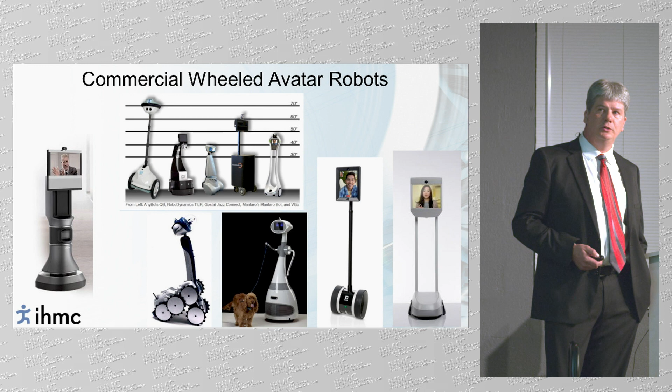There are actually some commercial versions of these. There's probably over a dozen companies that have tried to make money on these. You don't see them very often, so I don't know how well they're doing. We have bought this Double bot here we use occasionally, but hopefully there'll be markets for these sort of things. But as you see, they have no arms. They're pretty much like a teleconference device on wheels. They do have some advantages over just having a teleconference, but you can't do much with them.

And then, of course, we're always competing with sci-fi. I actually started using the word avatar for these robotic systems well before this movie came out, so not copying it. But in the movie Avatar, you have kind of an MRI-like device you sit in, and it can read your brain waves, and therefore you can somehow, through the magic of movies, teleoperate a biological robot and do things like fly around on these lizards.

Another amazing movie that I like is Surrogates, with Bruce Willis. Here, he lays on his couch all day wearing some sort of brain interface so that he can get his hair back and look a lot younger. Everybody in the world in this movie is a humanoid robot, and everyone's just sleeping on their couch, and of course, things go bad from that. So we don't have those technologies yet.

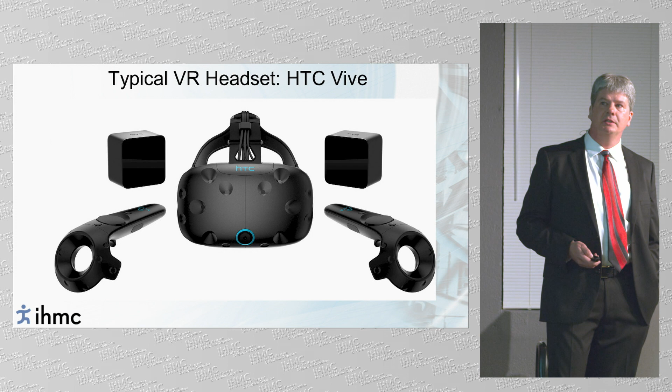The interface devices we have, some of the virtual reality goggles, are coming along really nicely. This is a Vive from HTC that I'll show operating a robot with. And as far as the sensors go, we've got good cameras. LiDAR is a spinning laser that shoots out into the world and measures the reflection time, and from that knows where points in the world are. I'll show what the data from that looks like, right here. So as it's picking up points, this is real time.

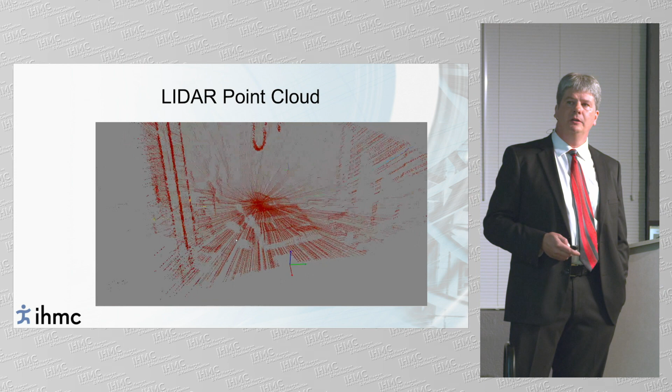It starts building a representation of the world. It's just a bunch of points, so it has to determine what that means. So what we typically do is look for flat surfaces that are good to walk on, and then combining that with your cameras, you can get color information, and it's really good for an operator, and people are coming up with really good algorithms for using that data.

So here's one of the humanoid avatar pioneers. Senator Rubio came and we gave him a tour, and in the background you can see Atlas there. He was able to, with just a couple minutes of training, walk over a pile of cinder blocks using the system.

Here's our professional operator, John Carff, who was our operator in the DARPA Robotics Challenge, using the headset to control Valkyrie here to pick up some water bottles and recycle them. So you might notice he'll move his arm before the robot does because he's not directly one-to-one controlling it.

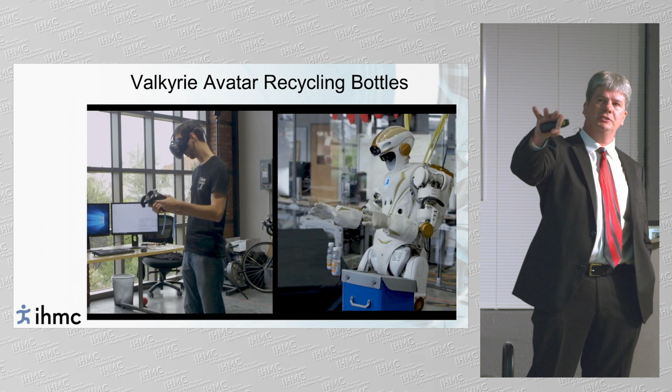In this one, he's kind of saying, okay, I want the arm to go there, looks good, go. And then the robot will change its body configuration to be able to get to that reach. So it's doing a lot of computation behind the scenes. The only thing that's being tracked on John is where his hands are and where his head's looking.

This is Atlas walking over a pile of cinder blocks, and so we gave John the challenge of: go over a pile of cinder blocks, grab a ball, move the trash can out of the way, and put the ball in the garbage can as quickly as you can. So this also is real time. I say that because a lot of our videos are really slow, so we speed them up, but not this one.

You can see in the bottom right, here John's kind of directly operating it where he's saying where each footstep should be. We also have algorithms for saying, okay, I want to walk over there, which he'll be doing after he picks up the ball, and he'll plan a path and some footsteps. There you saw him just kind of swipe in on the bottom right, the camera view.

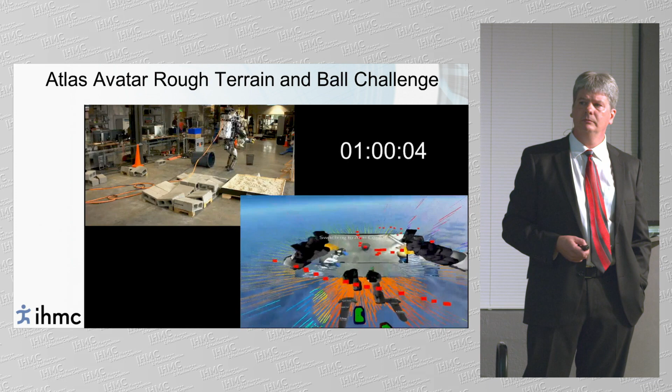So everything you're seeing back here is just the LiDAR points. So you get a pretty good representation as a human of what you're seeing, but then add on top of that the camera, and it's pretty good. And we're working on better algorithms for better operator interfaces, but I think there's quite a bit we can do with just these $500 virtual reality systems. So he was able to complete the challenge in about 1:10.

Okay, so that's Avatar robots. So why humanoid? I get this question a lot, and it's a good question. And so first, what do I mean by humanoid? So in my mind, we pretty much try to copy humans, but a lot of people are against that. Like, oh, maybe you can do better than nature, or why copy when the goal is just to get somewhere?

But humans have lots of advantages, and so by humanoid, I mean you pretty much have 2 legs, 2 arms. You use the arms mostly for manipulation, the legs mostly for mobility. You've got some sort of head with vision, maybe speech and hearing. You need a good sense of gravity because you're going to have to actively balance, because you're going to have a bipedal mode where sometimes you're on one foot, so you have to balance.

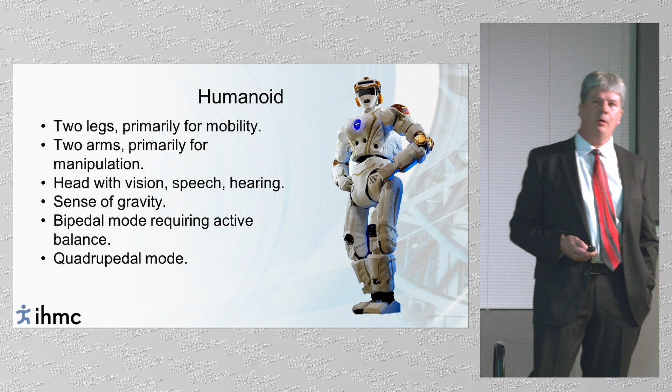But you might also have a quadrupedal mode. Humans don't use a quadrupedal mode much, but indeed we are quadrupeds. It isn't a question of making a quadruped versus a biped. It's more, in my mind, a question of how often are you quadrupedal versus how often you are bipedal.

So why humanoid? Well, the short answer is go where people go and do what people do. And if you think about where people can go and the things people can do when they get there, it's just incredible. I mean, this is just a small sampling of some of the mobility challenges that we face. And think of the different types of platforms, and here I just have 4 samples, and think about what it's like for each of them.

So you got the humanoid, quadruped, wheeled, and tracked. Think about what it's like for them and what the major limiting factor is for getting over some of these obstacles. It becomes readily apparent why humanoid has its advantages. So if you have a large gap, you're limited by your leg length. Well, human leg length is about 1 meter, so you can get over approximately a 1 meter gap without having to jump.

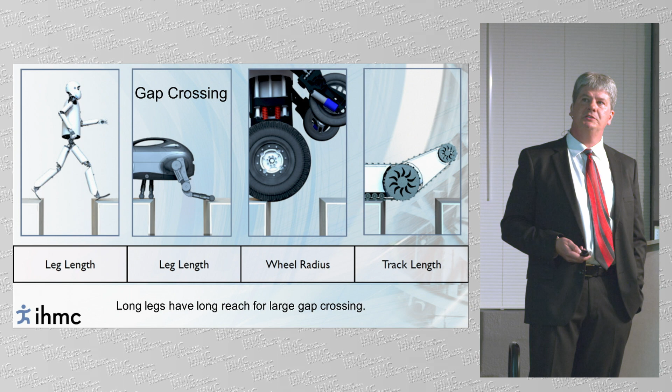A quadruped could do that if its leg was 1 meter long, so you're talking horse size. Of course, a dog could jump, but if you're not jumping, then you're going to be very large to get over a 1 meter gap. Something with a wheel to get over a 1 meter gap is going to have a meter radius wheel, so it's going to be enormous. And same with something with a track. And if you go through these one at a time, you keep seeing that you got great advantages.

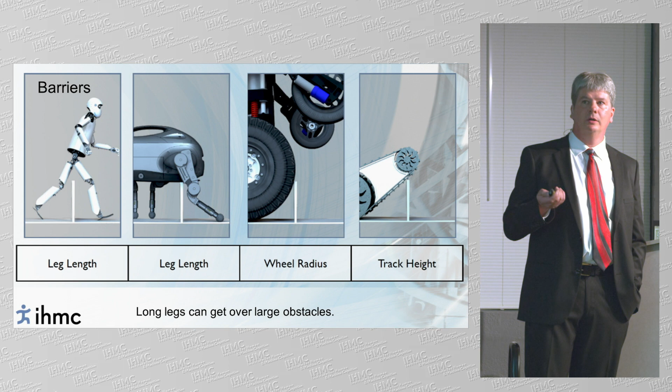If you're trying to get over something like a Jersey barrier, well, you need to be a tank if you've got wheels or tracks, or a horse. But a human can get over no problem. A human can get over a half-meter step, no problem. All of them do well on slopes.

Humans can climb ladders really well in the quadrupedal mode, whereas these other guys, you really couldn't do a ladder at all. And yes, dogs can climb ladders. If you have any question about can animal X do Y, the answer is going to be yes. Just YouTube for it, and you'll find it.

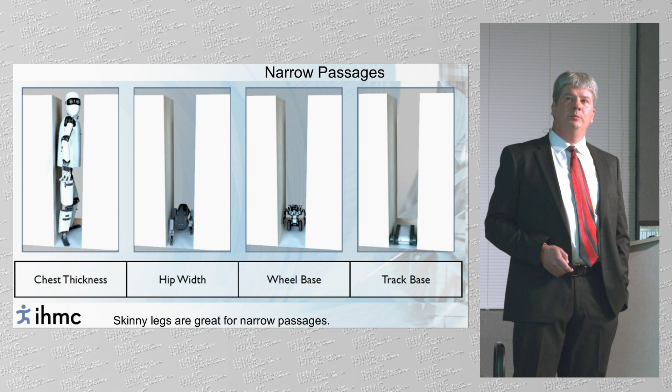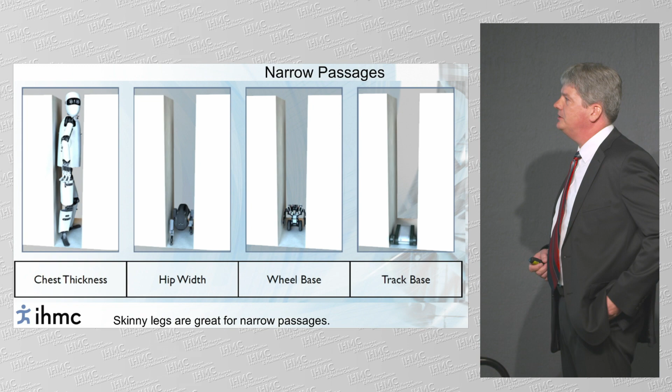Here's where humans really shine: narrow passages. So if you take a somewhat overweight 47-year-old male, the distance from chest to back is around 12 to 15 inches, maybe a little bit more if you're carrying a backpack. So you can have two sheer walls about that far away and you can get through it.

Whereas if you want to get through that with these other types of platforms, they have to be really small. So in some situations, these robots would have to be huge to get to the same place a human can. Sometimes they'd have to be really small, therefore they can't get to all the same places. And then if the gaps are only waist height, they only need to be about 8 inches apart. Your foot itself is only about 4 inches wide. And when you're standing on your toes, they're only about 3.5 inches deep.

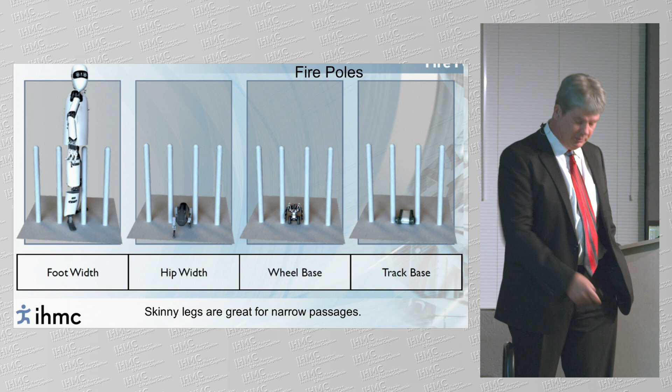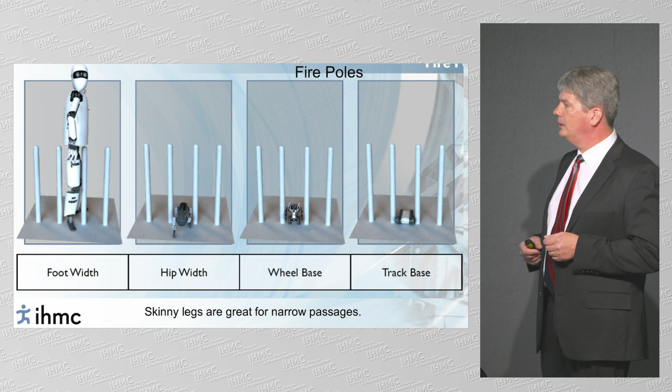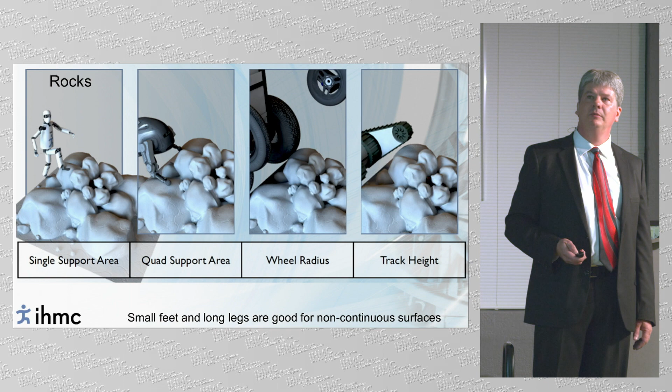So all you need is little pads throughout the environment about 1 meter apart, and you can get from point A to point B as long as you can set down on those. And those little pads that you're walking on can even be pointy rocks, as I'll show later. Balance beam: you'd have to be tiny with these wheeled robots to get over the same balance beam. And yes, dogs walk on balance beams. And rocks, of course, are pretty hard to get over if there's large gaps between them, stepping stones. I mean, the list goes on.

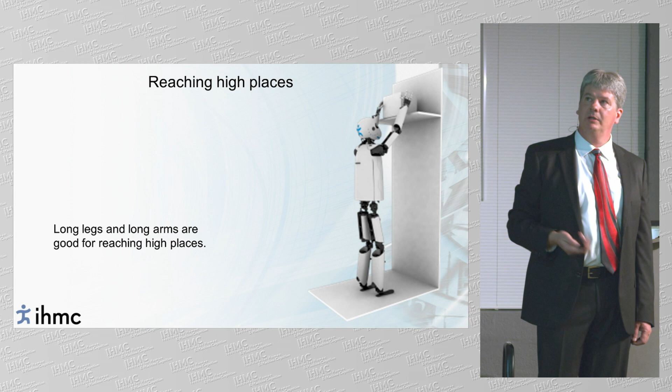Taking corners, you're very narrow, so you can squeeze around corners nicely. And then when you go in your quadrupedal mode, you can get under things nicely. And then you can reach some high places. I can easily reach something 7 feet up on a shelf and grab a book or whatever I'm looking for. So if you put it all together, humans are pretty good at each one of these things. And if you look at all the different things humans can do, they're pretty good.

They might not be the optimal solution for any one of them, but we're not trying to optimize for one thing. We're trying to find general purpose things that can get everywhere a human can get to, whereas the other things have trouble in a lot of them. And you think about where humans can get, it's really incredible the things they can do. I would argue that humans and humanoids, including monkeys and apes, are probably the most mobile land-based animals just by the shape of our body.

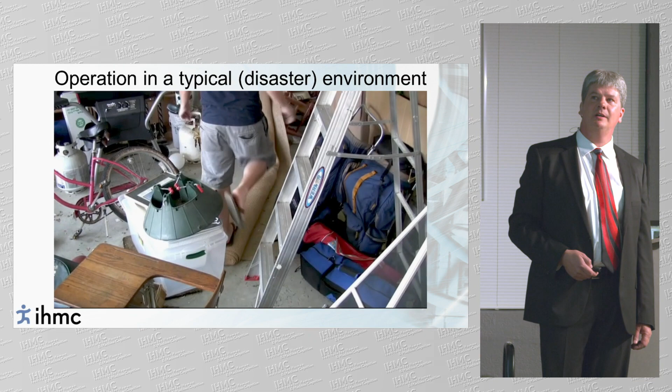And we're interested in disaster environments. So here's a typical disaster environment. And Jason here is showing how mobile he is. Try to imagine a wheeled or tracked robot getting through this typical disaster environment. And then we like to do various manipulation tasks, so he needed his tennis racket.

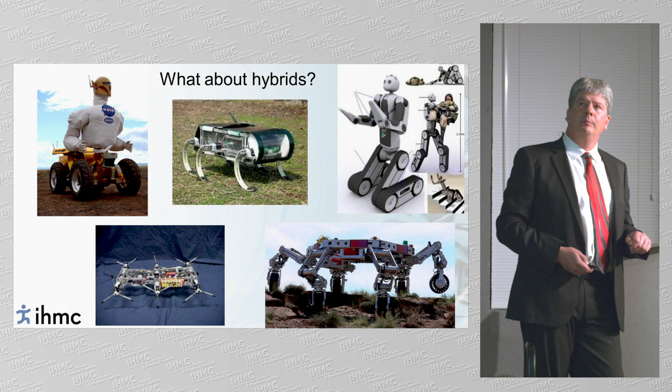Okay, so another question a lot of people ask me is, okay, great, what about hybrids? Why not get the advantages of both wheels and legs? And that's great, and there have been a lot of example robots out there that are hybrid. Some of these are pretty amazing. And humans are indeed hybrid. We can fly through the air; if we're crazy enough, we can jump out of a perfectly good airplane and coast with nothing but a suit. We can go hundreds of miles an hour, we can go on water, frozen water, everything.

And there have been some humanoid robots. This is just kind of a toy. I don't think it walks, but it's a good concept. During the DARPA Robotics Challenge, we actually had to ride a vehicle. And I think a Segway is a great platform for a humanoid robot to wheel around on. But whenever we use our hybrid appendages, we take them off before we go through our doors.

And it's really doors that are the bane of robots and the bane of our existence. There are lots of robots out in the world, but very few of them are good at going through doors, and none of them as good as a human, especially if there's stuff behind the door or a small door, getting up the steps before a door. And so if you want to thwart a robot, you just go behind a door.

And if you can chain it so that it only opens 8 inches, then humans can pass through it freely, but no robot I know of that's any bigger than my fist can get through it. So humanoid form could.

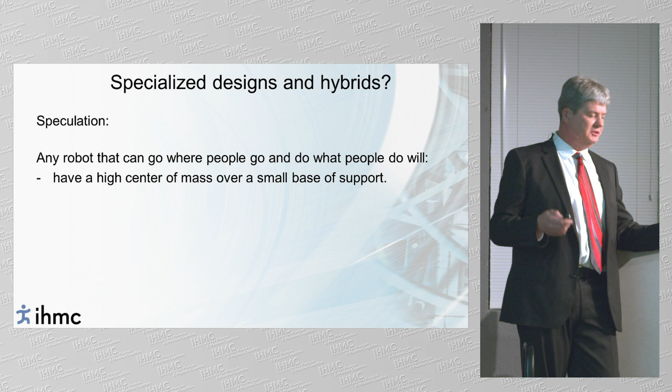So as far as specialized designs, I speculate that any robot that's as mobile as a human is going to have, just by necessity, some high center of mass like humans do over some small base of support. Because if you want to walk through these narrow gaps, you have to have a tall and skinny body. It's just plain and simple.

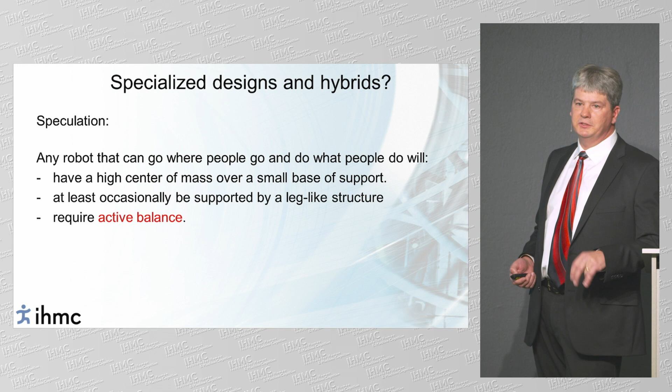And because of that, you're going to have some time when you're supported by some leg-like structure. It might not be something you'd call a leg, but it's going to be leg-like, and that's going to require active balance. And that's really what makes humanoids difficult from a control point of view, is this active balance.

So if you think about the ways we can balance, I'll talk about just standing first, is you can move your center of pressure on your foot. So as I'm standing here, I'm kind of wiggling my center of pressure where the force is on my foot in order to balance. If I start falling, I can take a step. And if I'm about to fall off the edge here, I can lunge a little bit because I can't take a step.

So that's another strategy. These are the three major strategies people use, and robots fall under the same physics as people, so these are the three strategies you have to use in robots. There's a couple others that have more minor effects that I won't get into. These are kind of the three big ones.

I'll go through a little bit of why these strategies work, okay? And really thinking about a tightrope analogy and balancing a broomstick analogy kind of explains 90% of why these strategies work. And using these real simple models of walking, you can come up with control algorithms for balance. So if you think about balancing a broomstick,

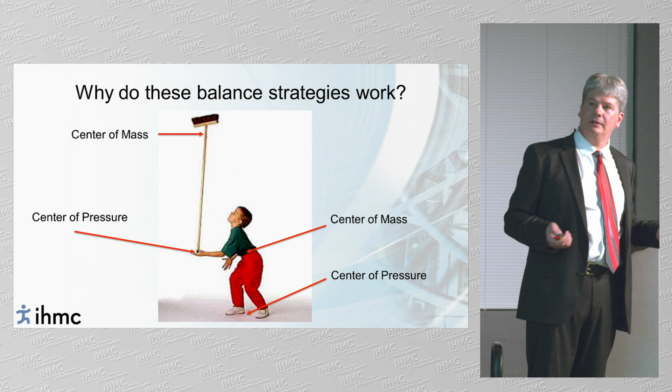Here, center of mass of the broomstick is about there, and the center of pressure is right about there. And what's really impressive is that he's also balancing himself at the same time, and there's center of mass there and center of pressure there. So what's the analogy? So as you're balancing a pendulum, the question is, where do you move your hand to keep it balanced?

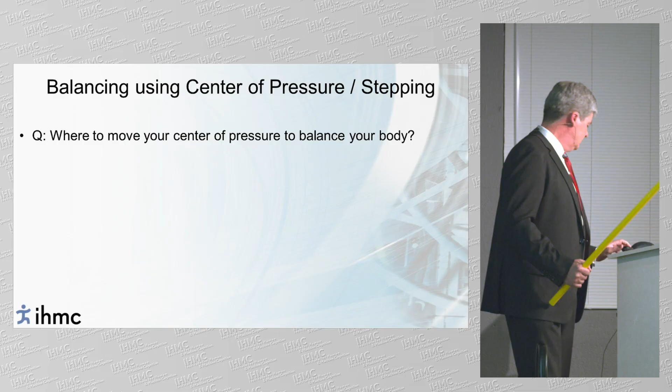And the answer, well, I guess the equivalent question of where do you move your center of pressure on your foot in order to balance is equivalent to where would you move your hand on your broomstick to balance. Okay? And so the answer is pretty much underneath your center of mass.

So if the stick moves, I need to get back under it, right? But the velocity is important too. If the stick's straight up and down, but it's moving that way, and I want to catch it, I'm going to have to get over here to anticipate where it's going to be. So it's some combination of the center of mass position and the velocity that's important for where you should

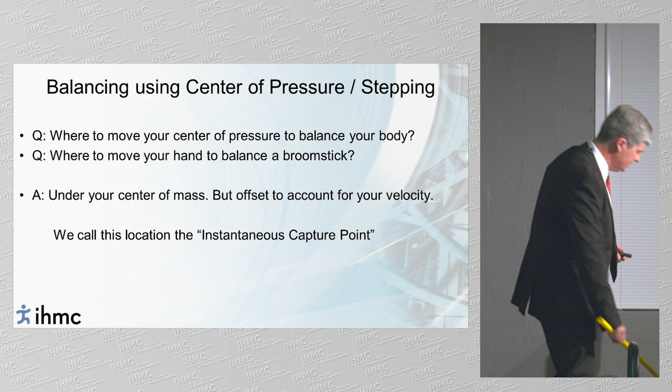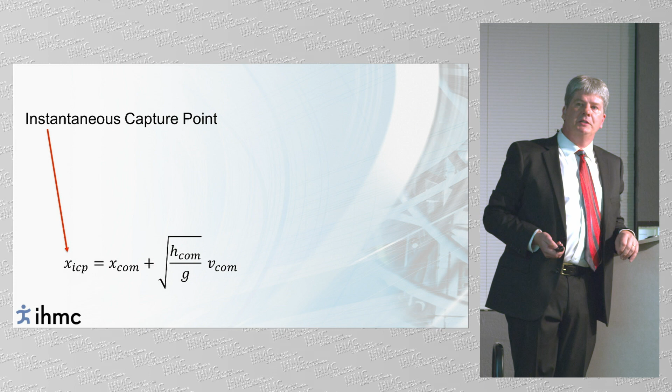catch the stick. And we refer to this location as the instantaneous capture point. And this is something that me and my colleagues came up with over the years on how to think about walking. So throw some equations up here. So the instantaneous capture point is x sub ICP. It's the center of mass location, offset to account for the center of mass velocity. So exactly what I said in words in the last slide.

Let's see here. And the proportional term here is the height of the center of mass divided by gravity and the square root of that. So if you look at human parameters, your center of mass height is about 1 meter. Gravity is 9.81 meters per second squared. So the square root of 1 over 9 or 10 is about 0.3, which means that your instantaneous capture point is going to be, if you take your center of mass velocity and multiply it by about 0.3, and add that, that's going to say how far you have to step or move your hand from where the center of mass is in order to come to a stop.

So for example, if I'm walking at 2 meters a second, which is typical human walking speed, and I want to come to a stop in 1 step, that would be 2 times 0.3, 0.6, so I would have to step about 60 centimeters, which is a normal size step to come to a stop. So as you're walking casually, you usually can come to a stop in about 1 step. If you're going a little bit faster, it might take you 2. If you're going really fast, it'll take you 3. There's very few situations where it'll take more than 3 steps to come to a stop, if you kind of extrapolate this out and account for how quickly you lose your energy.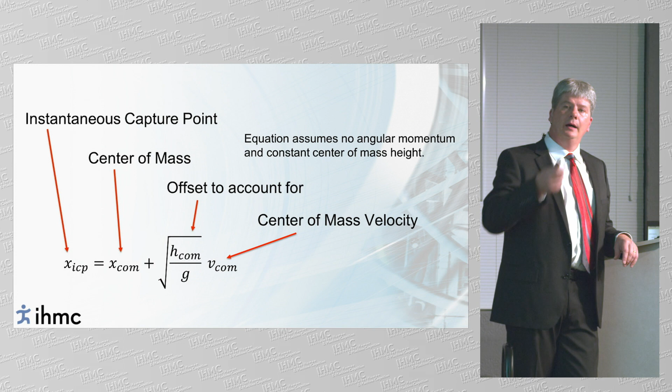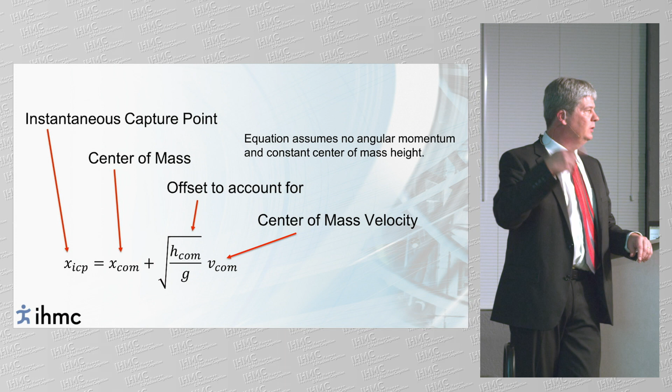Now this equation looks at an inverted pendulum model, but it assumes there's no angular momentum, so you don't have your arms flying around or your body lunging, and constant center of mass height. Okay? With an inverted pendulum, it'll change a little bit, and as you're walking, it changes a little bit, so it's not a perfect assumption, but it's pretty darn close. And you can control robots with those assumptions pretty well, especially on flat ground, but even walking over some moderately rough terrain. Once you start doing high steps, you have to start taking into consideration your center of mass height change.

So this is a robot we developed here called M2V2, showing balance recovery strategies. And so it's using these ideas for how to determine where to take a step. Okay, so now if you think about the dynamics, what happens to this instantaneous capture point as you're moving, it moves away from your center of pressure at a rate proportional to the distance between the center of pressure and the capture point.

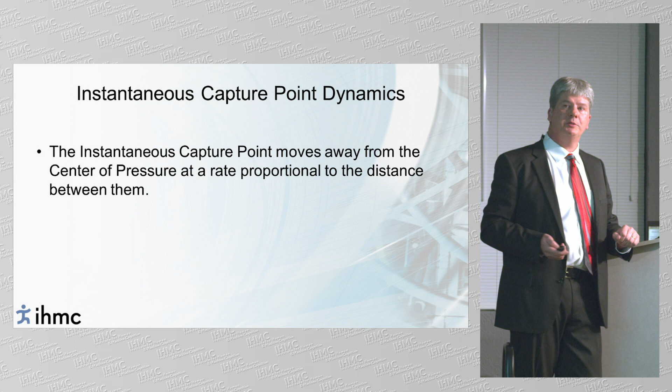So in equation form, x dot means derivative with respect to time, so the velocity of your instantaneous capture point is proportional to, and this is the same proportionality constant you saw before, but flipped upside down, so it'd be approximately 3 instead of 1/3, the distance from your instantaneous capture point to your center of pressure. And what's neat about this is that it's a linear equation, which means that your instantaneous capture point will move on a line away from your center of pressure. And again, this equation assumes no angular momentum and constant center of mass height.

So using this, here's an overhead view looking down where your foot is. You have your center of mass and your center of mass velocity. You put those together with a 0.3 multiplier to find your instantaneous capture point. Now we know our center of pressure has to stay inside of the foot when we're swinging our other leg. If we have it on this corner, then the instantaneous capture point will move this way. If we have it on this corner, the instantaneous capture point will move this way.

So that means where we're going to have to put our hand to balance a virtual pendulum, or where we need to step, is somewhere in this region. And we can only step so far. And it's going to take a while before we step, so we can't worry about this little triangle here. It's this wedge that we have to step into, and we call that the capture region.

That's the area on the ground where, if you want to come to a stop in a single step, as long as you step inside that, there's a solution for it. If you step outside of that, there's no solution. You can't come to a stop in a single step. You'll have to take a couple more steps. Or if you step way away from it, like way over here, you'll probably fall down because there won't be time to recapture your balance. Okay?

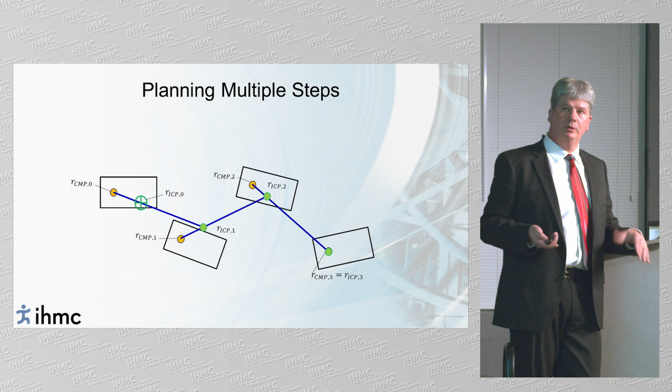Now, when we take those steps, the center of mass is going to do this pretty complicated, wiggly thing through it, but the instantaneous capture point will move along straight lines. So it makes the planning problem really, really quick, just using this simple geometry. And you can kind of see this.

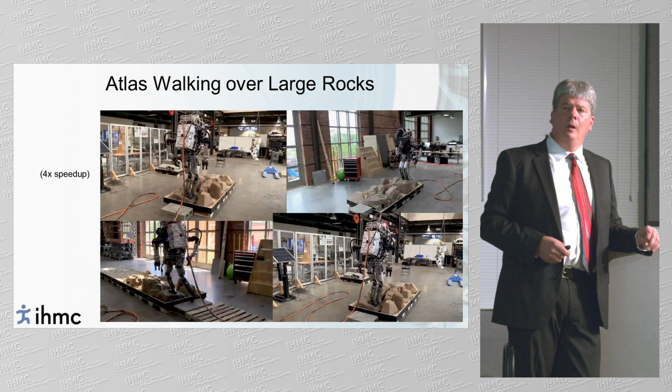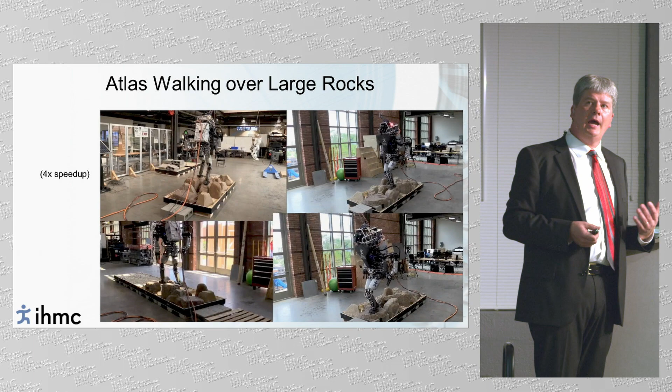So we can use these ideas to balance while planning footsteps over rough terrain. This is Atlas walking over some large rocks on 4 different instances. We're pretty much shooting about 50-50 on these when we run it. Sometimes the robot would fall in a gap. Half the time it did, it could pick its foot back up and keep going. And half the time it did, it fell down.

The operator is just looking at the LiDAR points and saying manually where to step in this one. This was before we were doing autonomous path planning, but we should be able to do autonomous path planning over these rocks now soon.

Okay, so that's if we assume there's no angular momentum, no mass in your body, if everything's concentrated at a point mass, but it's not. You've got a lot of mass in your arms, a lot of mass in your legs, so you can't assume you're just an inverted pendulum. But to understand the rest of walking, you can think about somebody walking on a tightrope using one of these poles to help them balance. And what that pole does is it gives them a really large rotational inertia, so by spinning it, he can move side to side and balance better.

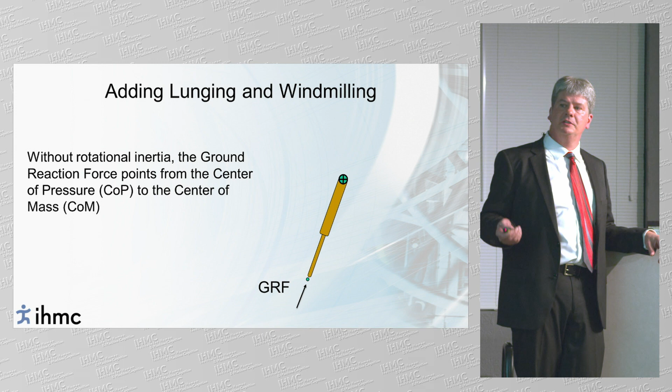So without rotational inertia, your ground reaction forces have to go from the center of pressure through to the center of mass, okay? And there's your center of pressure, your center of mass. But now if we think about using our angular momentum, the things we can do is we can lunge our body forward. If we're about to go off a hill, we can go like that, or we can windmill our arms. Or we can move our legs around too, but if you're stepping, it's less of an option.

We can think of real simple models of having a flywheel on your body that captures that rotational momentum so that if you were to accelerate your flywheel in that direction, your ground reaction force would now shift. And the reason why is because you're only interacting with the ground at a point, something has to create this torque, and your ground reaction force is kind of doing that. I mean, it's actually your hip, or your muscles that are applying forces, but in order to achieve those forces, your ground reaction force has to shift.

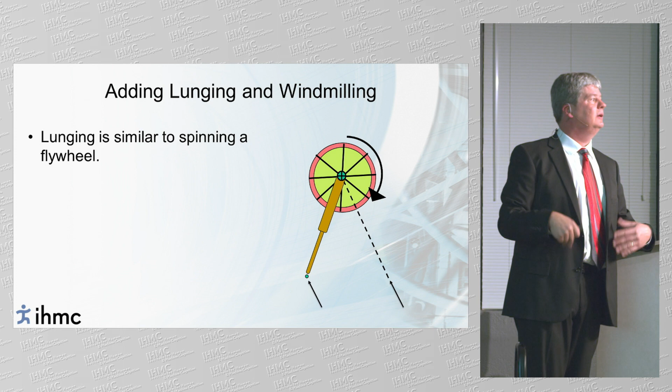And so now instead of pushing the pendulum away as it's falling, you now see that it's pushing back on it. And in fact, if we think about virtually translating that force where it now goes through the center of mass like it did before, it's almost as if the center of pressure moved for free. And so now we can move the center of pressure outside of our foot. We call this the centroidal moment point, or centroidal moment pivot.

Now, we don't have flywheels that can spin forever, right? I can just move my body a little bit. So we've got to pay that back after time, but it's a quick reaction I can do to prevent falling off the cliff.

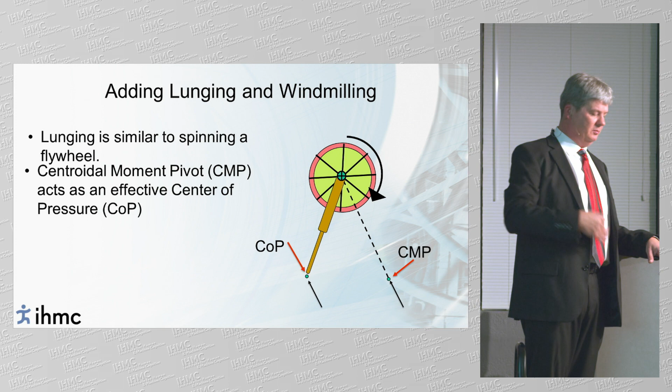What's nice about all this is instantaneous capture point dynamics stay the same. The only difference is you replace the center of pressure with a centroidal moment pivot. So you still have that the instantaneous capture point moves at a rate proportional to, at the same proportional constant, the distance between the centroidal moment pivot and the instantaneous capture point.

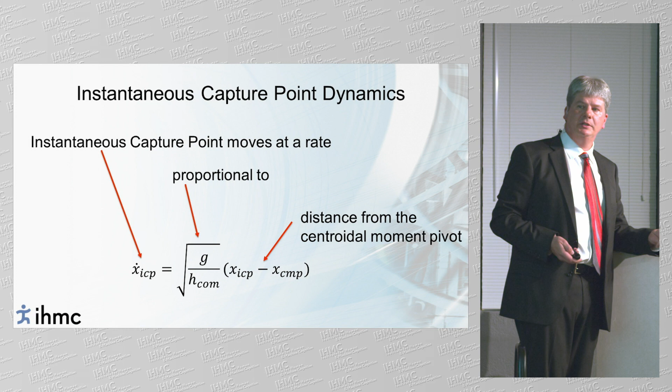So we can still do all this planning and things, and now the equation only assumes constant center of mass height. Okay, that's the only thing you have to assume for these to be valid equations that you can use for controlling your robot, which again is a fair assumption on flat ground.

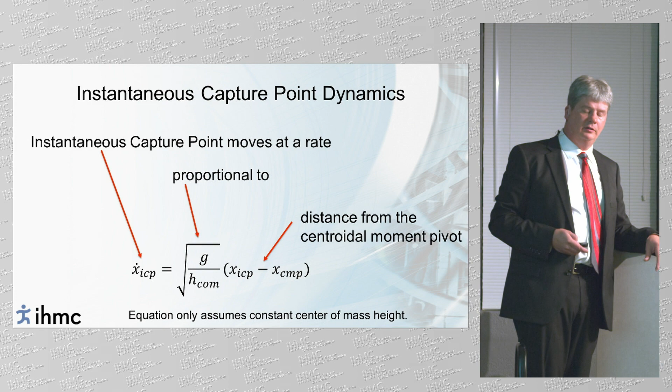So here we'll show Atlas using its internal angular momentum to balance on a line. This is a plywood turned sideways. So, humans, we can do this about as well. Maybe some people a little bit better, some people not as well. I think with a little bit of tweaking, this is one task that we can do better than humans with robots. And the reason for that is the sensors in the robot are really good.

Knowing which way down is super important for balancing. Our vestibular system is pretty good, but compared to IMUs, inertial measurement units and gyroscopes and all that stuff, they're just incredible. And then the other reason is the update rate of what's going on in the robot is fast. Typically you're doing maybe 500 to 1,000 updates every second. Whereas a human, you just kind of have more delays in your biological wiring system.

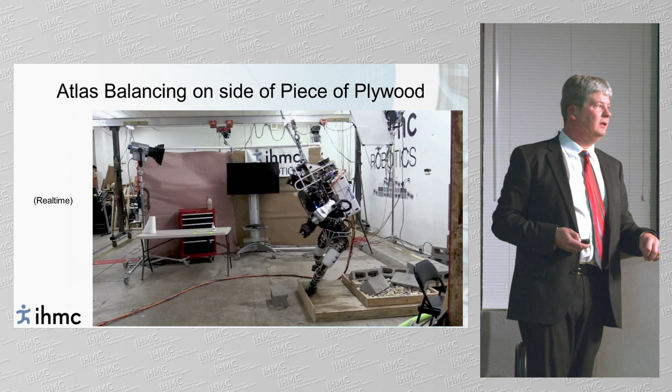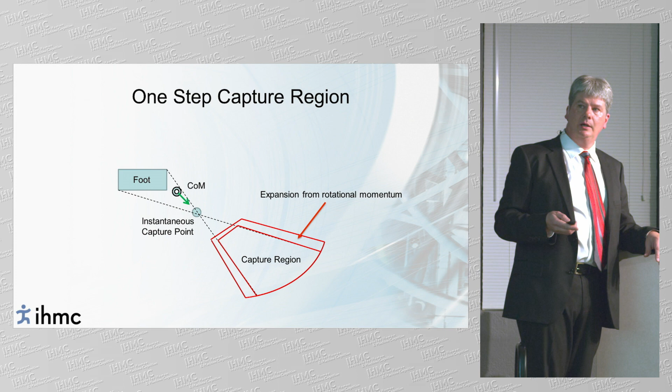So tasks like these, robots can do better. Just about everything else, they're much worse currently, but they could start getting almost as good as humans on a lot of them. As far as the one-step capture region goes, when you add angular momentum, what it does is it kind of grows the region, allows you to step in more places if you're willing to lunge your upper body or throw your arms around.

Okay, so the primary active balance strategies, again, you can move your center of pressure in your foot, and as long as your instantaneous capture point is inside your base of support, this is a successful strategy. As soon as it leaves, you have to either lunge your body, which can get it back a little bit, or take a step, which allows you to effectively move your center of pressure a large distance. It's like when you're balancing the broomstick, it's like moving it a large distance, right?

Okay, and we've taken a lot of this theory and extended it to a few other areas. One is planning over stepping stones, multi-step balance recovery. So if you have, say, stepping stones in a pond and you have to plan a few out after you got pushed or something, you can extend this to figure out how to do that. A lot of people have been working on relaxing the assumption of having a constant center of mass height. The equations become more complicated, but it's kind of the same ideas.

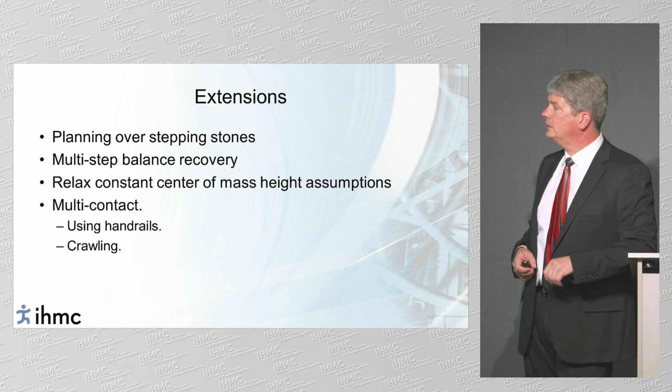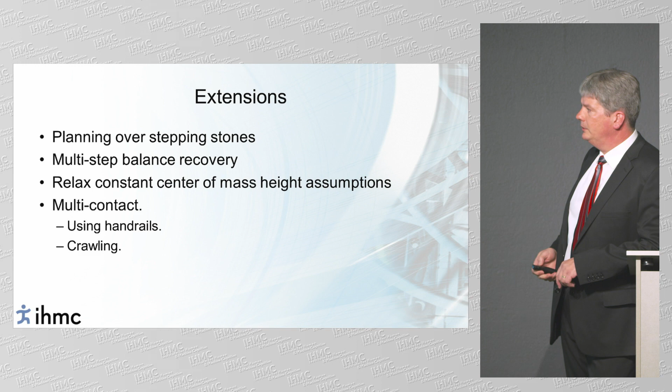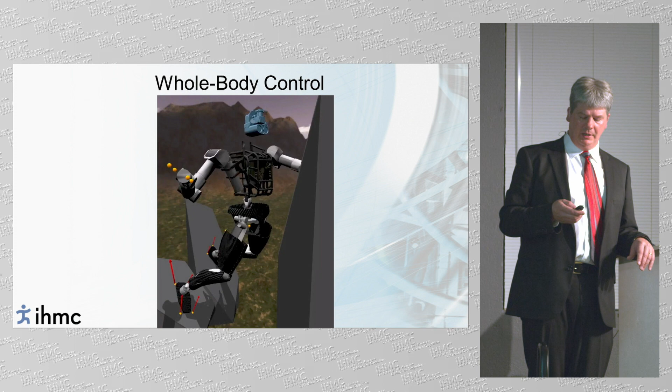And so with that algorithm, we can do things like have the robot have its feet on different surfaces and holding another surface and move its body around. Haven't done this much with the real robot yet, but in simulation it works great. And there's a paper if you're interested in that one.

All right, so your main challenge is you can't statically balance in single support on a pointy rock, okay? When you're on it, you have to take another step or you're going to fall. Detecting contact conditions is hard with the robot. With a human, you essentially sense the ground. You almost see it with your feet because you've got really good sensors. We don't have really good pressure sensors on the bottom of the feet. We pretty much just know where the overall center of pressure is.

You have to use what we call leap of faith maneuvers, where you might be rested on two pointy rocks really nicely, but to get to the next one, you're going to have to trust that you're going to get there, because if you don't make that step, you're going to fall. Because again, you can't stay supported on the one. And because of that, you usually need to use some sort of angular body momentum.

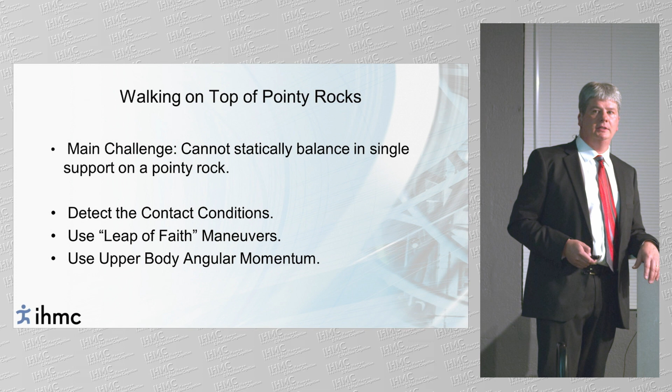One benefit of walking on pointy rocks is that you don't have to worry about slipping so much, right? Imagine if you have a sheer rock that's perfectly flat at an angle. If it's more than 45, you can't step on it. You'll just slide down the hill. But if you're walking on a point, you can angle your foot however you want so that you can push into that point so that you don't have to worry about sliding at all. So that's one thing that makes it easier.

And you see that here when people walk, here's like a knife edge. First, your foot will be back so that you can push that way, and then once you get over, you want to push the other way so you flip over the edge. So this shows Atlas walking over cinder blocks that are turned on their side, so it's like a knife edge. The robot takes a little time to figure out what its contact conditions are, and then takes a step.

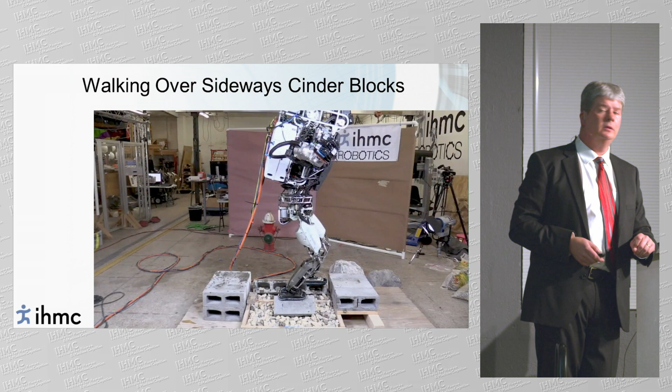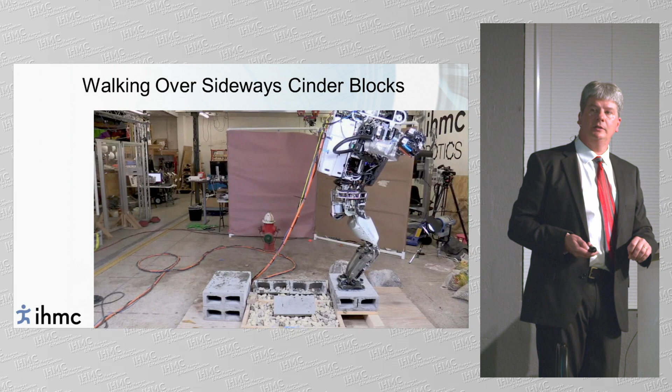And while taking a step, you see it, if it has to use its upper body angular momentum, windmill a little bit, it will. And if it doesn't, it won't. And it might because nothing's perfect, even though mathematically it knows exactly what it needs to do. It might not achieve that because the hardware is not perfect, so it might be off a little bit and need to windmill. So here you can see it using its angular momentum a little bit more. So there's another paper if you're interested in that.

Okay, so moving on to body path and footstep planning. So when you want to avatar one of these robots, you might not necessarily want to control every single detail of what's going on, right? I mean, that would be one mode that would be really cool, and that's kind of the mode in the two movies I showed, Avatar and Surrogates.

But if you're doing that, you kind of have to have really good sensation of what's going on for it to work. If you're having to place individual footsteps as you're running over something, then you're not paying attention to everything else. So it'd be nice to have things that help the operator, like autonomous path planning is one that we're working on.

So the way we do this is we acquire a point cloud using a LiDAR or the stereo cameras. Then from that point cloud, we look for planar regions. And like in this room, you'd find that the ground is all one planar region, that step, this step, and the top of each chair, you can't step on those.

Human environments, human designed environments, and even natural environments have a lot of really good planar flat regions. And even like a road with some gravel, you could detect that as mostly a flat region. So we find all our planar regions that we can step on. Then we break this up into two parts.

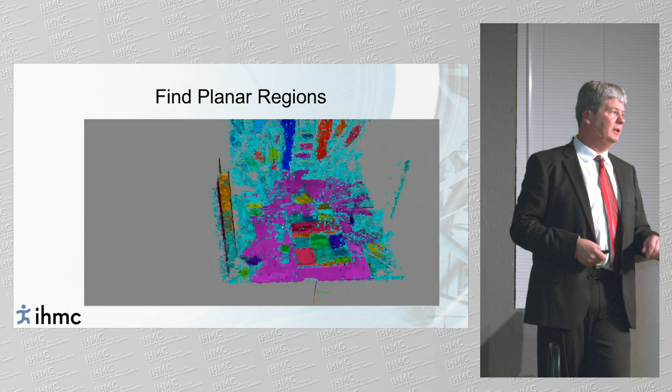This shows finding planar regions. So from those same points that you just saw, it's detecting all the planar regions and coloring them each different colors. And that works approximately in real time. If we tweak it a little bit, we should be able to get that to be real time.

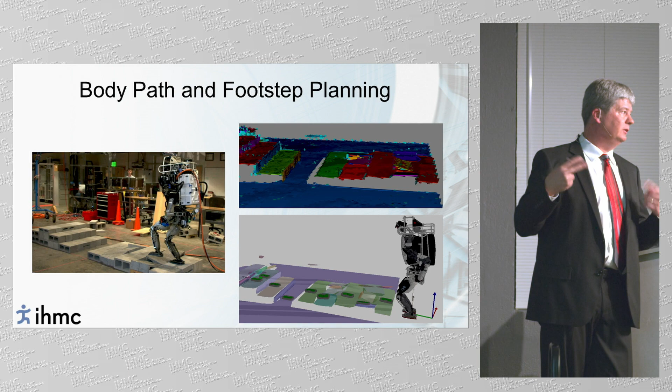And so here you see for this pile of cinder blocks what the planar regions look like, and then after you tell it to plan a path to the other side, the individual footsteps. And you can either plan those out once or plan as you go. Since you can't see on the other side of the cinder blocks, it can't plan the steps down, so it has to be doing this real time as it's going, collecting the new data points as they become available.

Now, one thing you do have to worry about is knowing where the robot is. As it walks, it's using dead reckoning to know where it is. It's counting how far each step was, but you're going to be off by a couple centimeters each time. So you have to either collect your data really fast as you're walking, or do what's called localization.

As you're walking, look at where the environment is and see that, oh, I think it shifted a little bit. Well, really, I shifted where the robot thinks it is. Therefore, I should shift back where I think I am. And then the data I had previously is still valid. But typically, you're losing, depending on how well the robot's tweaked, anywhere from a couple millimeters to a couple centimeters per step. So something this far, you could probably plan once, take those steps and be okay, especially with the cinder blocks being fairly large.

Okay, so co-exploration of hazardous environments. What do we mean by that? So that's kind of an application question, and there's a lot of potential applications for humanoid robots, probably hundreds of thousands of them, and they're difficult to build. Very difficult, extremely difficult. And I think a lot of people confuse the difficulty of building them with whether or not they'll be useful. A lot of people would say, oh, humanoid robots, they're not useful, they would fall down. Well, that's not useful versus hard.

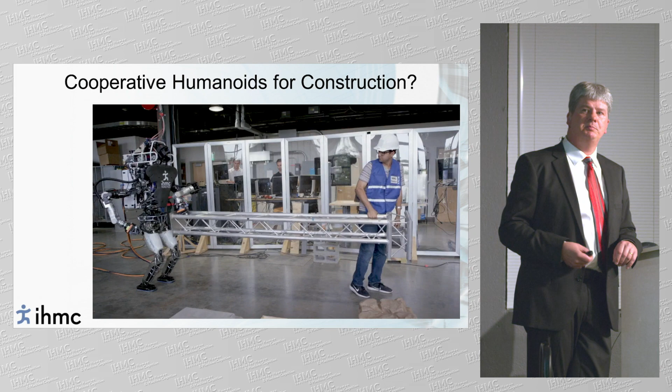Before we'll know whether or not they're useful, they have to achieve some sort of acceptable level of performance. But we can play around with some of these applications. So construction, probably not going to be a good application for humanoids to start, but we can think about things, especially for things like planetary construction. If you're on Mars, it might be, if you got to put together your habitats.

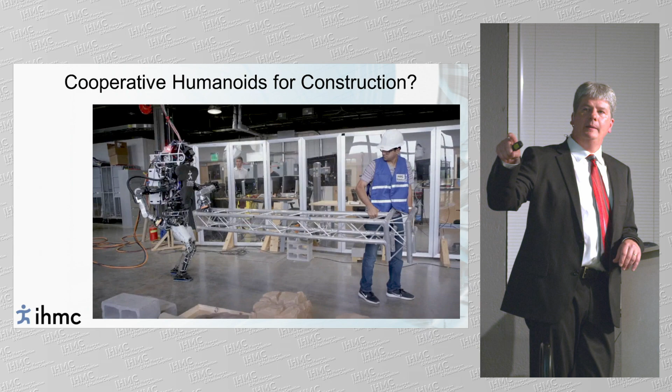And what's neat about this video is we're operating the robot by interacting with it through the beam. So as you push the beam around, the robot will move in the direction you're moving. It's not very fast in this demo, but you should be able to make this real human speed, no problem.

So maintenance on Mars, you need to do a lot of things like clean the debris off of solar panels. If you think of all the things that Watney did in the movie The Martian, those could be possible applications. One was he had to go clean his solar panels every day because dust got on them.

For firefighting, we got the Pensacola Fire Department to hook us up to the water spigot, and unfortunately, they didn't let us put out a fire. They claim that it wouldn't really look any better than cones, but I don't know. I'd like to put out a fire.

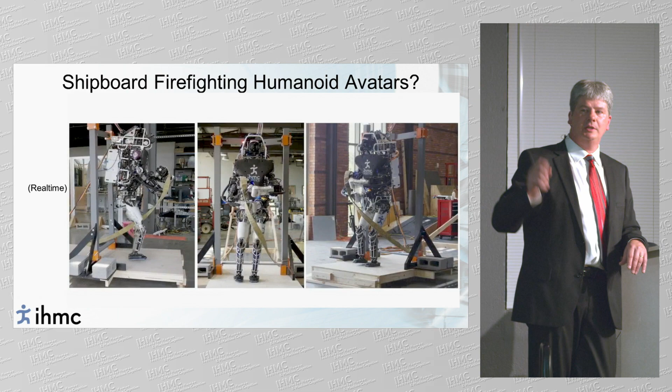The Navy is interested in possibly having robots put out fires aboard ships. And the difficulty there is you have high sea conditions as simulated by Billy pushing the thing up and down. And you have hatches with things you need to step over, plus you're carrying a hose possibly. So certainly not as fast as it would need to be, but without changing the walking algorithm at all, it's able to balance in conditions like this.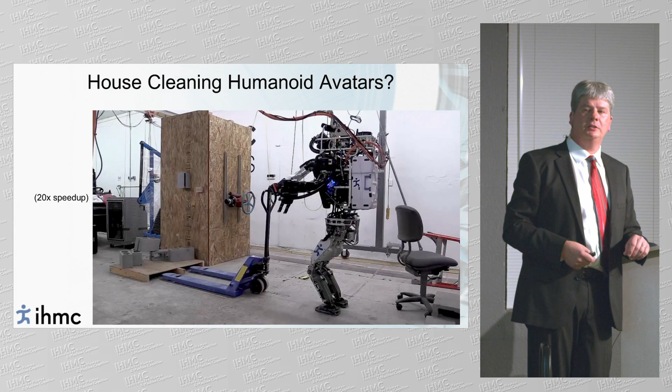And maybe you're cleaning house or doing whatever. In this video, John Carff, operator, this was after the DARPA Robotics Challenge, and we were like, we've got this humanoid robot, we've got a really good user interface, let's see what else we can do. So he just threw a bunch of challenges out there and played around with it to see what he could do. This is sped up 20 times because a lot of this he's kind of thinking through, okay, I would have to do this and this and this. So definitely not very fast.

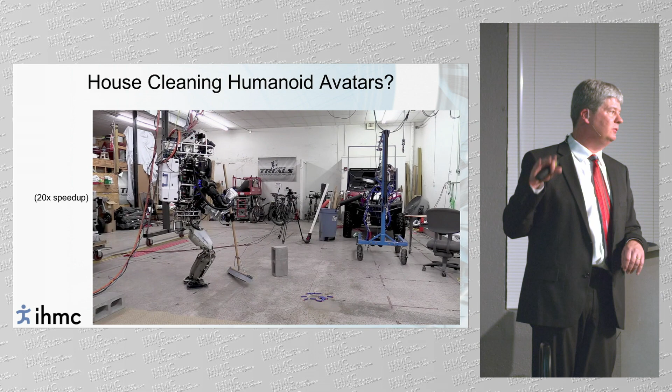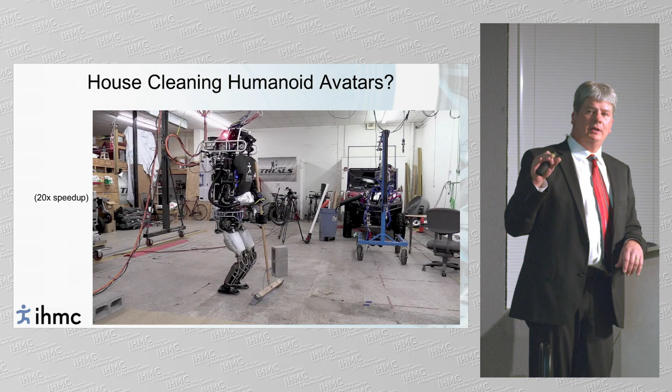But what's neat about this is that we now know that these robots are physically capable of doing these tasks. Maybe not fast, but if we can speed them up, work on them, we could do a lot of these. And a lot are really challenging because the operator is not feeling interaction forces. The operator is not feeling the broom. When he's turning on the vacuum, he's only doing it by sight. He can't feel the switch.

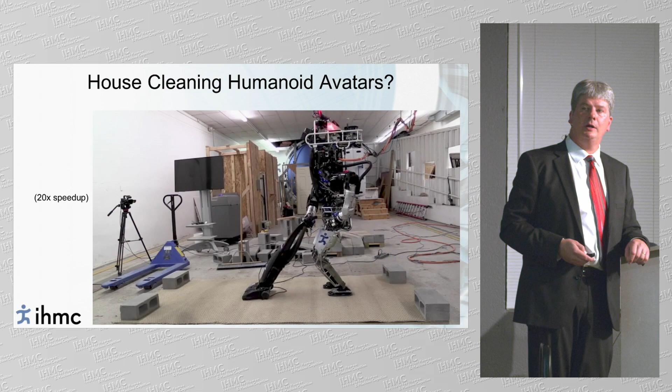So here's our DARPA Robotics Challenge entry. This is sped up a bit because it did take us 50 minutes. I'm not going to subject you to all 50 minutes. But if you speed it up by a factor of 15, you can get through it in a few minutes.

The first thing we had to do was drive a car. That was actually pretty straightforward and fun. They yelled at us for going too fast. Then you have to get out of the car. That was actually probably the most challenging part, is getting out of the car.

Then you have to go through a door. So what you see in here is in the upper left, that is what the operator is seeing. And you can see, so John here is operating. He's a solo operator, but he's got 3 of us talking over his shoulder. I don't know if that helped at all.

But you can see like here, the robot needs to turn a valve. So John puts a valve target in the world, looking at the light, lining it up with the LiDAR points and what he's seen from the camera. And then once that valve target is there, he can say, okay, now run the valve turn algorithm. And it'll start going through the valve turning algorithm. While it's doing that, John's analyzing what's going on, and if anything goes wrong, he jumps in and changes what it's doing. So he can jump around from a higher level to a lower level as he's doing these tasks.

Then he had to grab a drill and turn it on and cut a hole through a piece of drywall. That was pretty challenging, just getting the grip on the drill. You know, these hands are just 3 fingers grippers. Robot hands are really hard. I mean, they're harder than the rest of the robot.

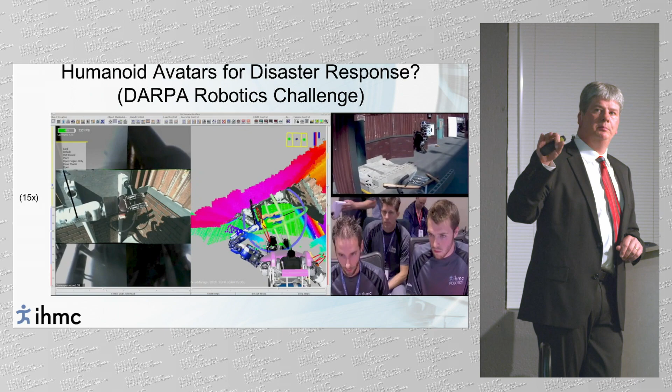So after that, he had to go and grab a plug. It's kind of like a magnetic plug, pull it off and put it back in. It took a little bit of lining up by sight. So the data we're getting from the robot is occasionally delayed. And at this point in the competition, it's either delayed or cut off for like 10 seconds at a time sometimes. So we're operating on old data as we're doing it, but it's pretty reliable, but you have to keep getting a visual once the data comes back. So that task took longer than it probably should.

For doing the stepping stones, on the first day we fell down. That was entirely my fault in deciding where to put it. So on the second day, we kind of played chicken here and just took them 2 at a time, and took more than we needed to, and just manually put them out there. But it worked. And then after that, you had to get up some stairs.

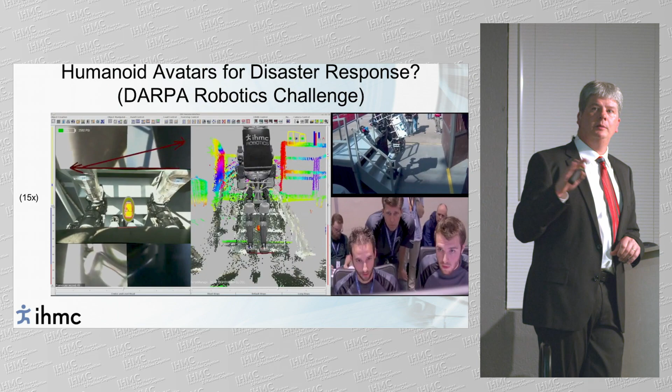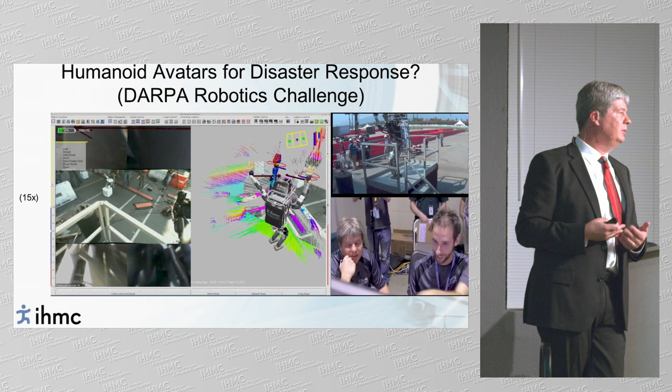So you can kind of extrapolate this. If we can speed it up by about a factor of 5 or so, which I think we can, there might be some potential applications for real world things. Again, though, if the robot falls, which is what everybody was paranoid about, which is why we went as slow as we did, you're done with these robots because they can't get back up. So I think getting back up from a fall is what the robots really need to be able to do before we start trusting them and before we can really start using them in the real world.

And of course, there's entertainment. Another awesome movie, Hugh Jackman, Real Steel. In fact, all good stories are about love, redemption, and humanoid robots.

Okay, so this word "towards" in the title. That's kind of a weasel word that scientists use to mean, you know, we're making progress, we're not there yet, we got a lot of work to do, and therefore we need a lot of funding to get there. But there are some major challenges. I would argue a good portion of those challenges are in the mechanics. A lot of the stuff we're trying to do with humanoid robots works amazingly well in simulation, and we can develop like 10 times faster in simulation. Trying to get them working on the real robot is really hard because of the components we're limited to.

But there's been a lot of enabling trends, especially with self-driving cars pushing technologies now. I mean, just computers are amazing, communications are amazing. Like what you can process, these point clouds are amazing, perception of computer vision. The virtual reality interfaces are becoming amazing. All of these things are really making progress.

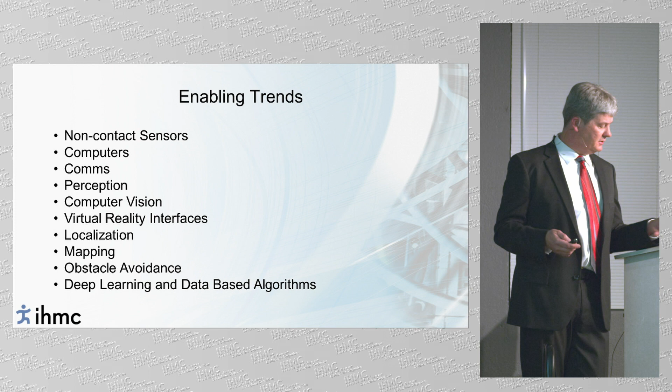And non-contact sensors are really amazing. The contact sensors, actually feeling forces and things like that, they're getting better, but much more slowly. So here's my humanoid wish list. I won't go over all of it. I'll just mention that a lot of these things are things that we don't work on, and we're just relying on what's commercially available.

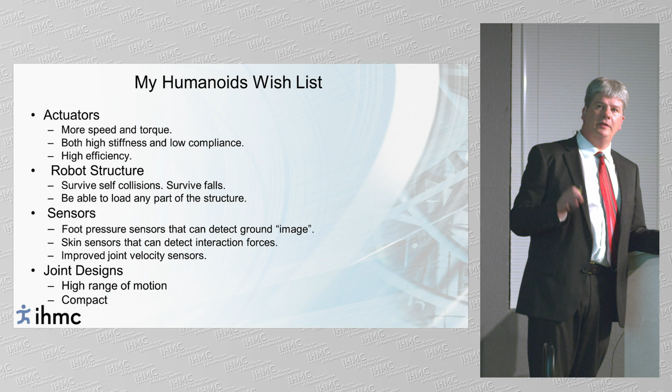The things that we do work on are robot structure when we design the robots, and joint designs, but it's very humbling looking at what nature can do. You look at what the range of motion of a shoulder is, just amazing. So you have a ball and socket joint, which gives you 3 different motions. But not only that, you've got shrug. You can move your shoulder up and down, forward, backwards. So even if my arm's all the way out there, I can still move it back and forth.

So you have what we call 5 degrees of freedom in your shoulder, and it's all operated by about 24 muscle groups, and they're laid out in such a way that they're over each other and spread out a lot, so that no matter where your arm is, you have a good lever arm on it that some set of muscle can pull nicely with, okay? So, as I move my arm, one set of muscle no longer does any effect on it, but another set of muscle kicks in.

So here's some of the muscles, here's some more, and then you got your pecs and everything, and if you count them, there's quite a few. But copying that is super hard because we don't have actuators that package as nicely as muscle. When you look at some of the specifications of our actuators, like torque and speed and power, they're comparable to muscle, not quite as good. Like hydraulics are super high power, but they're very inefficient. Electric are not as high power, but they're more efficient.

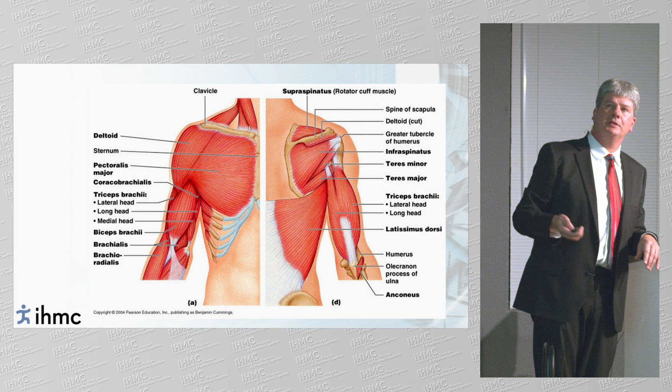But it brings up the question, can we build something that's as good as a human? And I was talking with my buddy Victor, who's working on a new robot design, and he was asking, okay, so what are we shooting for here? And I'm like, well, human gymnast. He's like, okay. Now, Victor's very optimistic, if you've ever met him. And I'm like, no, Victor, you can't. He's like, well, I will try. And I was like, okay, well, look at degrees of freedom, range of motion, power, weight, volume, all of that. See if you can get it packaged in the form of a human gymnast. And so he's originally from Romania, now a Canadian citizen. And so naturally he said, okay, well, we have to name it Nadia.

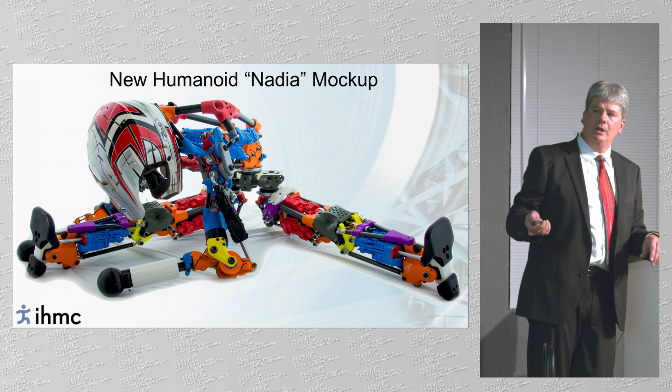And so here is the current mock-up. So this isn't a real robot. This is all plastic, but it's printed plastic that has all the components for the robot. 3D printing is amazing for designing robots, because as you're designing, you can quickly just print something like this out and see if all the parts fit, see if things hit, which is really hard to do in CAD. And then a nice thing is we have the mock-up of the actuators, and these are actual actuators that you can buy off the shelf, but this is just a printed plastic version. We have them so you can lock them in place, so we can pose the robot. So we have a lot of fun posing the robot.

So these are the actuators from a company called Moog. They're 3D printed also in titanium. They have all the components you need, your piston, your sensors, your electronics. Pretty much half the complexity of what goes into a robot is now in one of these packages, so we can just buy it and focus on the other half of the complexity, which is the joint design.

They're a bit pricey still, but if you look at the torque speed curve, this is a torque speed curve. If you look at the torque versus the speed of a typical human knee, you can achieve better than that with hydraulics if you have the right valve, in about the same weight as the muscle. So power to weight. Now this isn't taking into consideration that you need a backpack pumping your fluid through.

Electric motors, a typical off-the-shelf one without doing anything fancy, is about half as strong as a human for the same weight. But people have been pushing the envelope on those. But the reason to use hydraulics is just the power density.

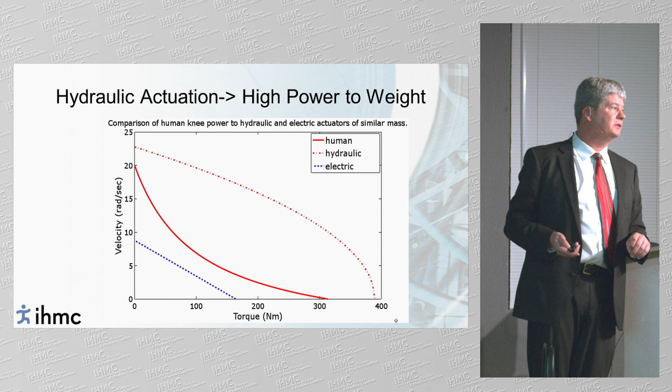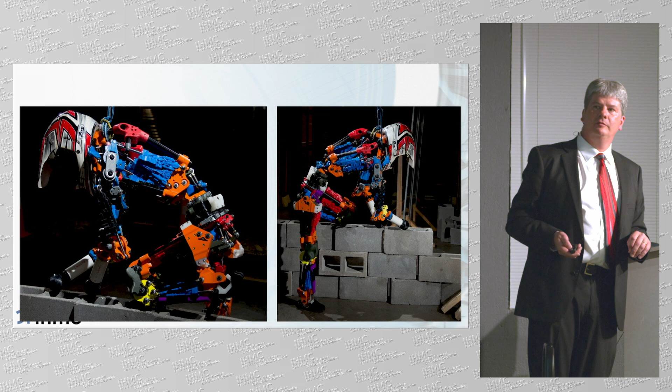So some more poses. You can curl it up nicely. Wow. Yeah, we really want to be able to crawl. We just have a helmet on here since we didn't know what to do with the head yet, and we just threw that on there and it looked really nice, or maybe that's what it'll look like in the end. And then we can pose it like going over some typical environments we'd be interested in crawling through. So the answer is no, but we can move towards that goal with the right funding.

So a final thought, and I'm stealing this phrase or modifying it from Matt Ondler, who used to be at NASA and is now at Houston Mechatronics. We live in the century of the humanoid avatar robot. It's going to happen. Eventually, I don't know if we'll ever get better than human, but certainly we'll probably get 60, 80% as far as what a human can do, especially in mobility. Manipulation is another question. Just what hands can do is incredible. So we'll see. We can make some progress.

The real question is what decade, and that'll probably be dictated more by if there's economic benefit towards it, if there's some reason why a big company would start working on these in a big way. But we will see.